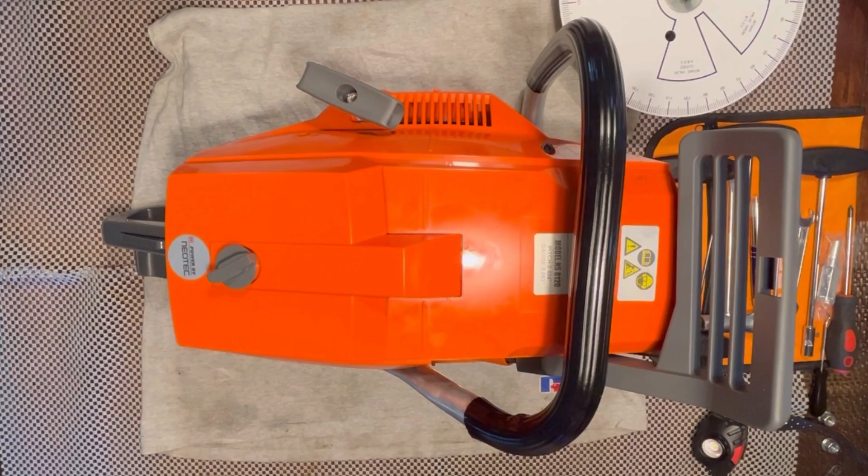Typically I tear saws down to repair them. But just a couple things I wanted to say before we get started on this, and I appreciate you listening to this part if you could.

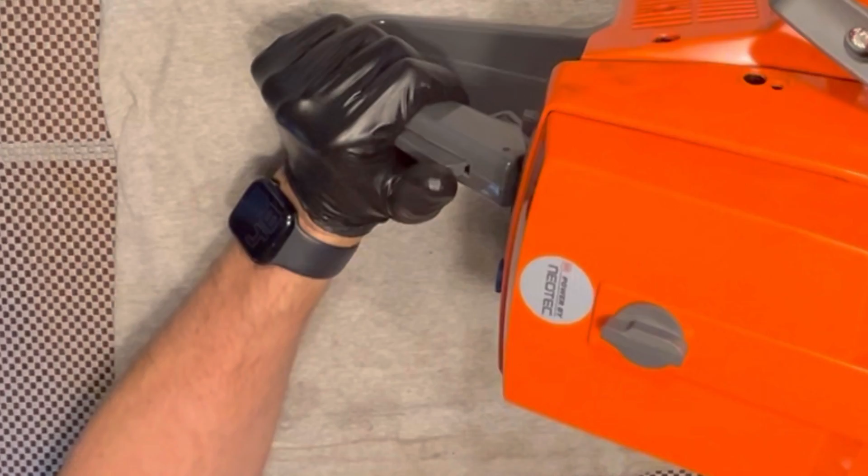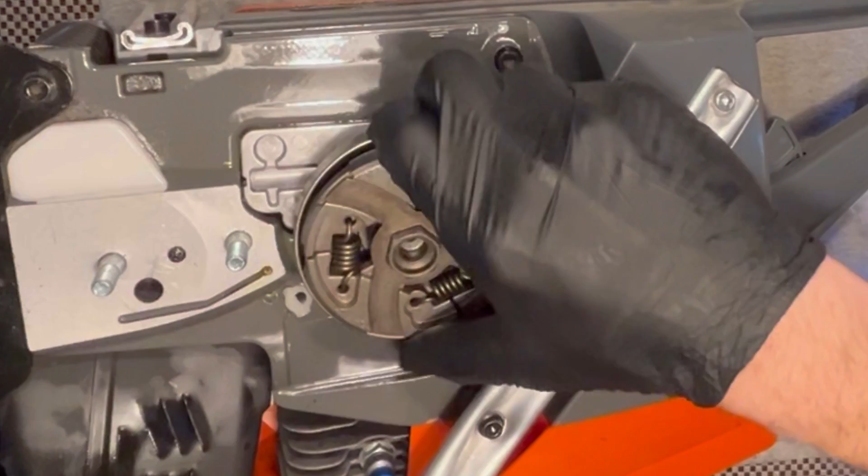Next is the oiler. Let's see if I can get this clutch off real quick here - righty loosey. Probably not. There it goes. Yeah, it says right on the clutch how to take it off and put it back on. You'll see it say 'off' right here, this way. Just in case you're new to saws, they're a lot like that for safety. So anyway, there's the clutch, take this off, and the bearing.

And the sprocket, which goes here. If you don't know, this comes with a 7-pin on it, and you have an 8-pin that's optional, because this saw definitely can pull that 8, no problem. But if you're going to be milling, I encourage you to leave the 7 on there. You can also put a 3/8 on there, whatever you want to do.

What I want to say real quick is this clutch housing fits inside this worm gear right here. The worm gear turns the oiler mechanism inside. So that's how that works, if you don't know. Most people watching this probably know that, sorry guys, but I gotta put it all out there.

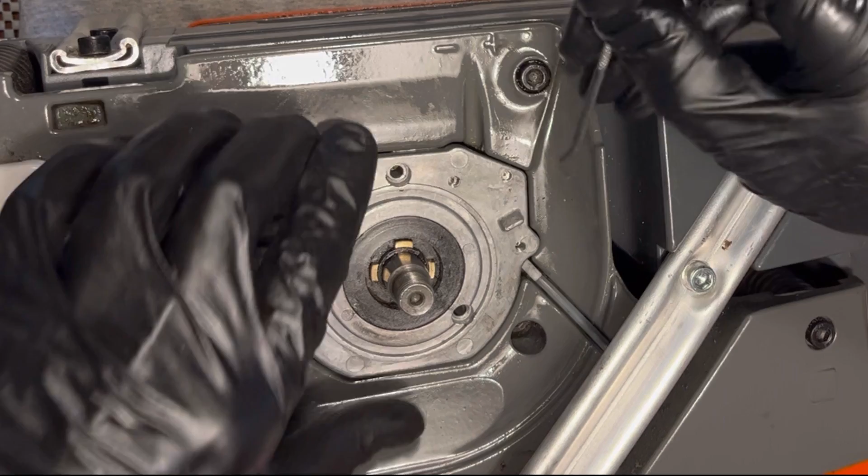And, well, you want to take this off first. Counterclockwise takes it off. Okay, that's your worm gear. Doesn't matter, you don't have to take it off first. And there should be a washer in here too.

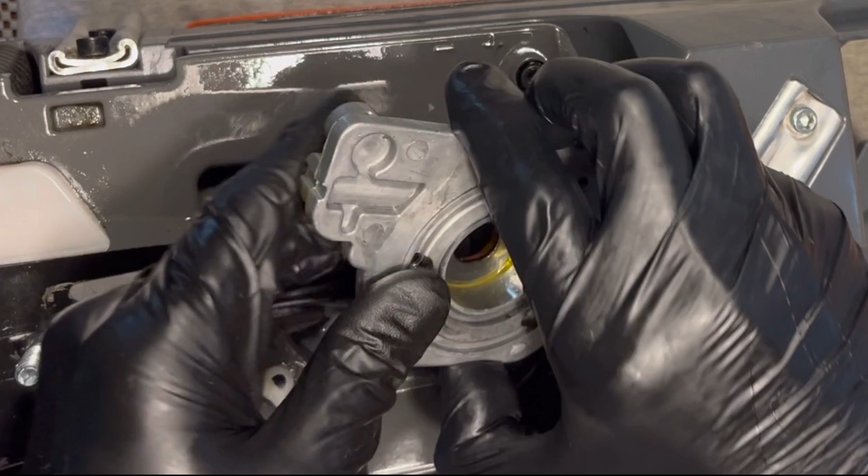Yeah, there's a little washer right here. And this right here is the seal to the PTO side, so be very careful with that. And this is what it looks like.

Man, a little spring starting to come off there too. You don't want that off.

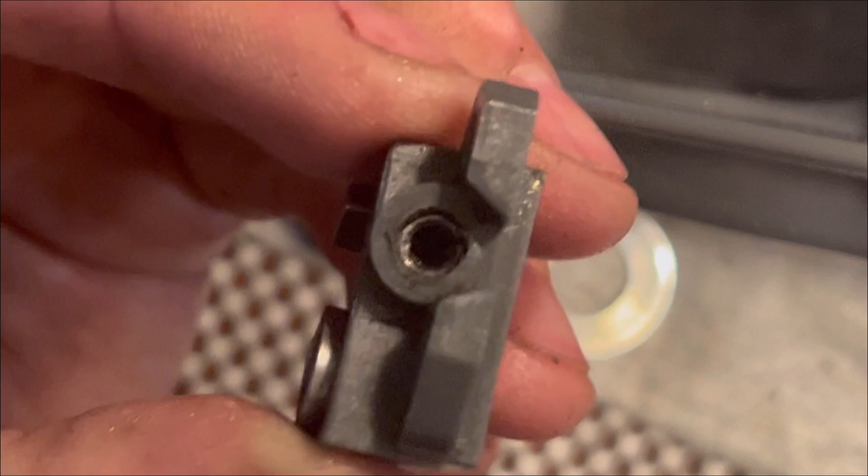As far as the oil adjustment goes, I think this was their attempt at it. There's typically a larger flathead screw here. And what they'd done was they just kind of capped it off with the small Allen.

So what you can do basically, and this works in conjunction with your manual oiler, it's almost like an idle screw. See how the screw, or the arm for the manual oiler, goes up and down. I think that's what they were trying to do there, which in theory I guess would work.

I don't like how loose that screw is. I also don't like the fact that you can turn it all the way out, because all the way out would be, oh, that's the other thing.

It's the opposite of what the OEM says. Well, it's the opposite of what the chainsaw here says as well. Plus is counterclockwise, and less oil is clockwise. It would be the opposite here, because clockwise pulls that arm up, which gives you more oil.

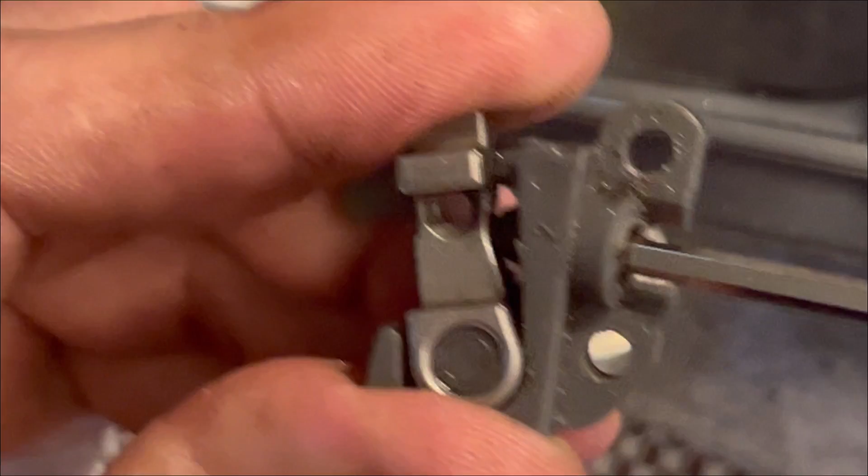So be aware of that if you get one of these. That's kind of what that looks like. And there is a little, I don't know what this is. I think it just protects this manual oiler mechanism from getting dust and debris in it. This little sponge thing right here.

But the problem you might come to see is your oil gets pulled from the bar oil reservoir from this port right here, and this is where your filter and everything is on the other side of this. It gets pulled up and then it comes right through here into here, and it continues to pull it through this port and then in through here.

I don't like this design at all, FYI, but whatever. And then it goes through there, then it goes inside the tank, then it loops around in a line, a little rubber line, and then it comes out right here to oil your bar.

One problem was I opened this, mine wasn't oiling. I opened this and there was a little tiny O-ring just kind of sitting, hanging out right down here. And I'm like, oh, that doesn't look right. I didn't know where it went because I've never opened one of these before.

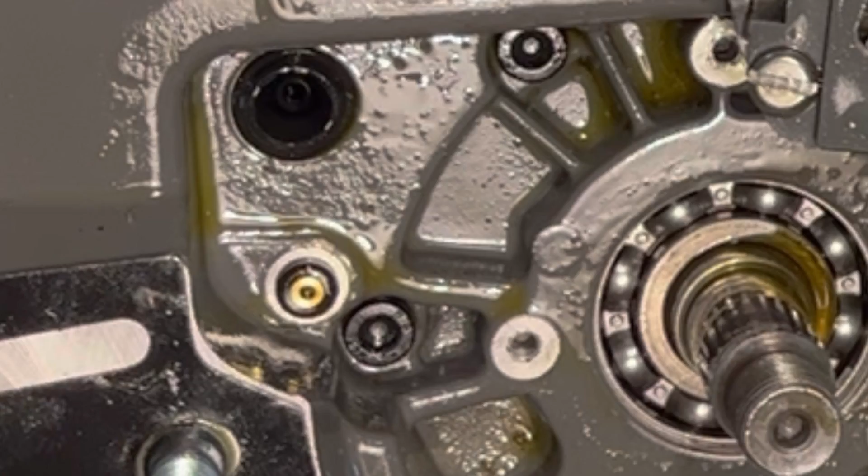And apparently it goes right here. There's two O-rings right here on this. Okay, I don't know why they did that. It probably isn't factory like that, but it might be. But there's two O-rings right here on mine. Okay, put it back on here.

It worked just fine. Now Killinger's, I don't know when he's going to put his videos out on this, but hopefully he's not going to beat me up for saying it. But on his, this whole mechanism right here, this screw was out and just laying down here, and so he had to feed this back through and tighten that screw down.

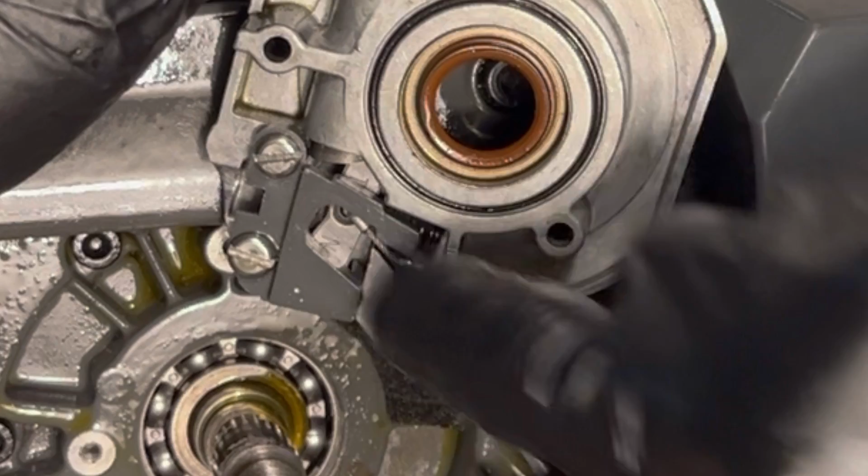And because the manual, this is a manual oiler, you know, it's up by the on-off switch. So when you pull it, it pumps more oil. It allows this to pump more oil is what it does.

Word to the wise, unless you have a lot of patience, don't ever take these two screws here off, because there's a spring right here that'll fly off, and if you don't lose it, you try to put that back in, it is a pain in the butt, man. Putting all this back on in that at the same time.

So another thing I want to tell you about really quick that I know about is I was looking everywhere for the vent for the bar oil, because there's a vent in almost every chainsaw, right?

Here's another design - the vent I found. I'm not sure if this is OEM, but I'd be surprised if it was like this from the factory. You can see right here, this is broken off, it's a chain guide. There's one on the bottom, and a big one that sits right here on top. I was prying at it because most of them just pop off, so you can replace them when they wear out. This one didn't pop off, it broke off. But behind this, right here, sits the vent.

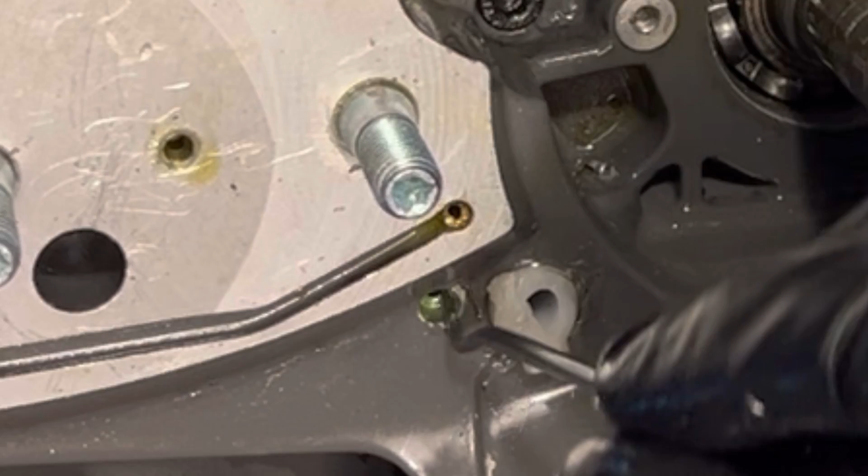It's a little duckbill vent. I'll take this off and show you. But you can't take this off unless this chain guide is off. Hence the reason I was looking for that vent, and it broke. Anyway, right down here is a little duckbill. Let me get it for you, if I can. Yeah, I think it's coming. Well, daggone it. There it goes, there it is right there. Hoping that shows up on camera.

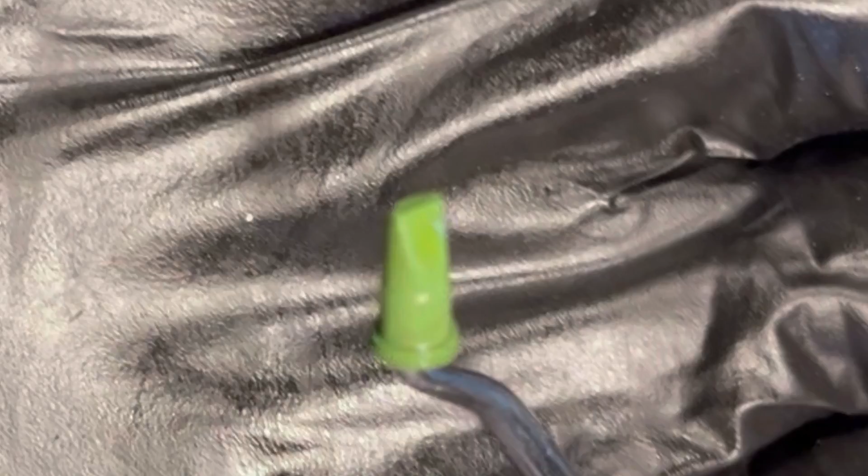It's a little duckbill, basically a one-way valve that works off pressure. It'll pull air in, but it won't let it out. But that's your vent, located right there. What a horrible place to put that, huh? Another thing real quick, this screw hole goes all the way into the oil reservoir. So if you have this off and you tilt your saw the other way, oil will pour out of that hole.

This mount is a D009 large Husky mount when you go to get a bar. So yeah, this muffler, real quick, let's talk about it. There's like 7 shark fins inside this muffler, and that's it. So if you plan on milling or using one of these saws extensively, I don't recommend that. You can get a plate or something, but it's going to burn this flag eventually if you run it over time. You can see where it sits down on the flag, see there?

And the back side of this is plastic. My buddy Tanton pointed that out to me, and I'm glad he did. That is not right - the OEM design has a deflector that comes out like this. So what I'm probably gonna do is just punch all this down and make something here, because I plan on milling with this and stuff, but I don't like that, not a good design.

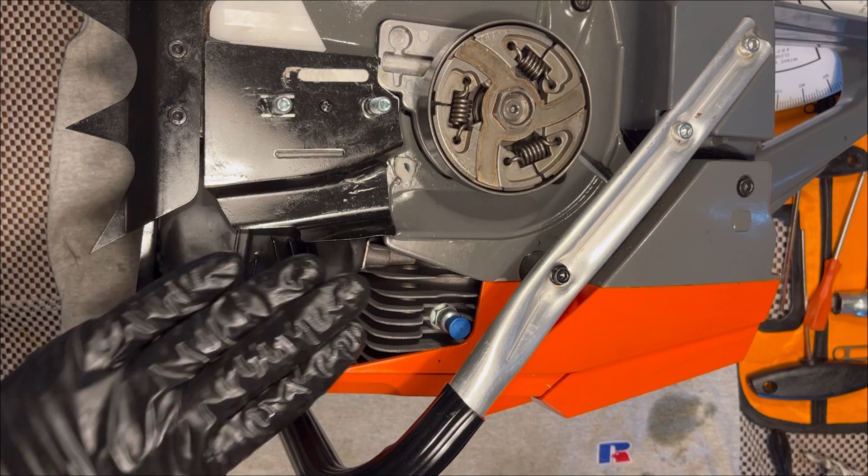Okay, so there's little protector pads here, I don't know what those are called. And there's 2 Allens right here, and then these 2 Allens here. And when you take this out, I wonder if I remove these screws, if it'll help. I hate to do that, but I'm going to.

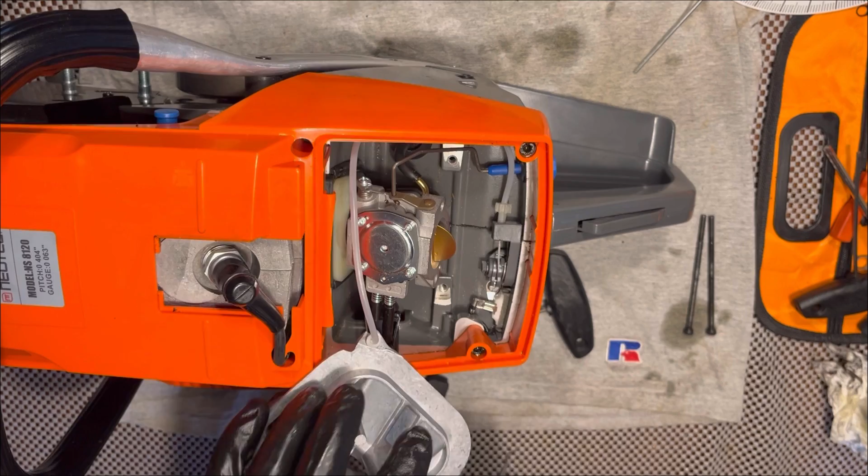Not really. You can see this sucker is in there now. Gee whiz, I'm gonna try to pull that to the side. That's the throttle? Sure is, jeez. Yeah, that's like really in there. Just a tiny little slit right there. Can I pull this? Oh yeah, so you get this rubber stuff.

Here we go, okay, now I'm gonna take this off. And oh, this intake just, wow, just kind of, yeah. There's the intake. Wow, yeah, it kind of just sits in there. So that's interesting.

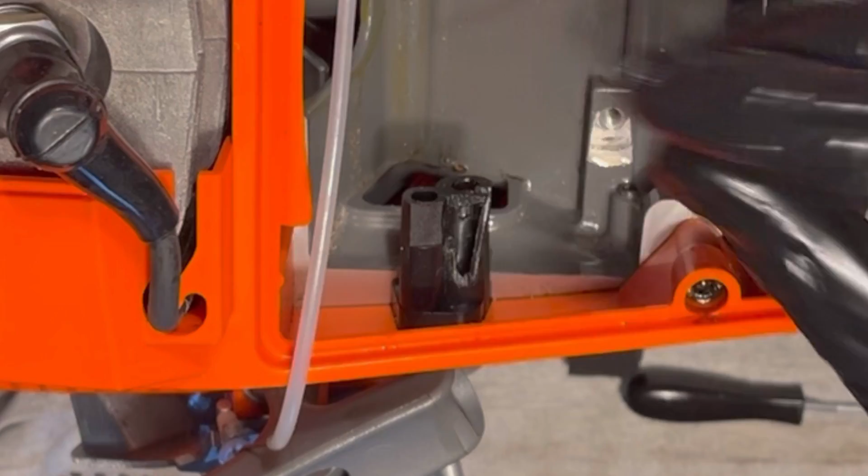So we'll kind of put that to the side. Here's one thing I do not like, is this deal right here. Is it molded in there? This little housing for the jet screws, I do not like that. It looked like it's kind of cut or something. I don't understand that - it's probably cut so you can get to the other screw, but let's look at this carburetor.

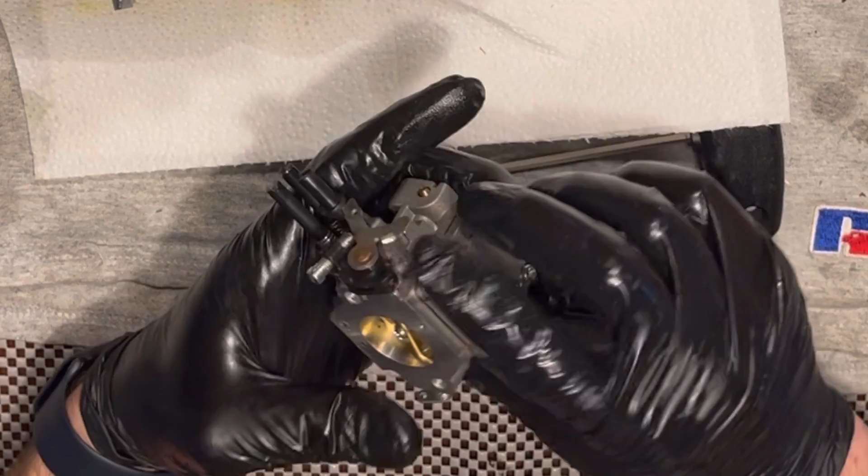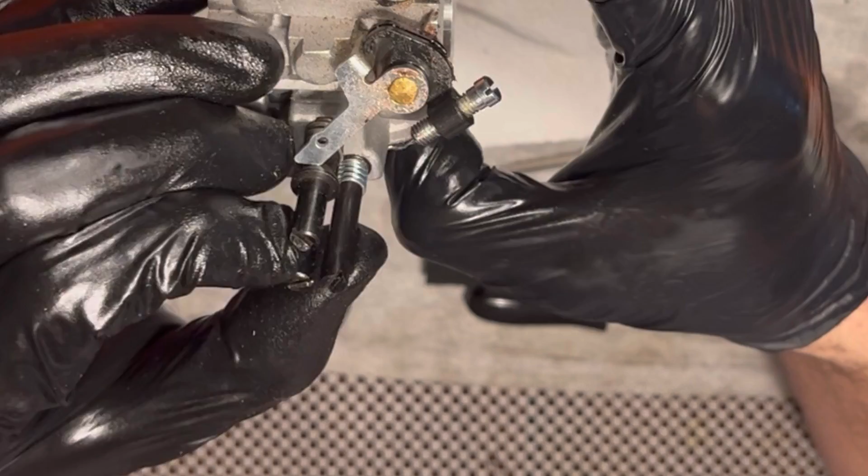Again, you guys are looking at this at the same time I am - that's the first time I've ever even had one in my hand. So I'm looking at this here, so this is what it looks like. And so when you go to tune it - that makes no sense. Hold on. Oh, wow, okay.

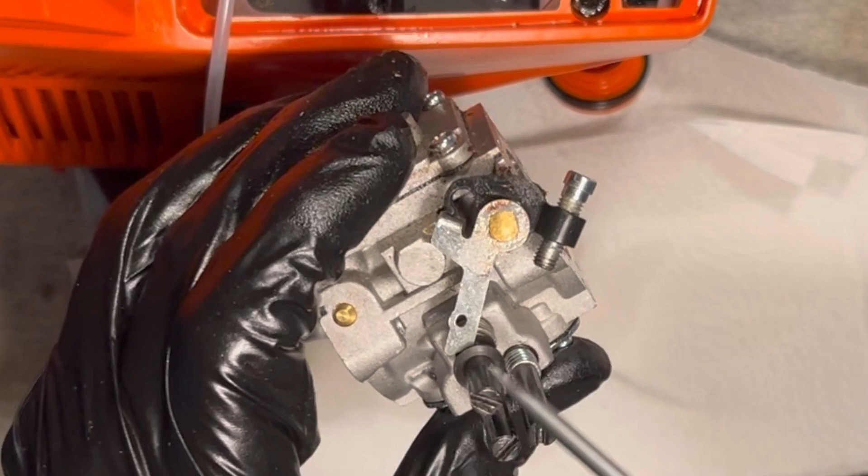This is the idle screw. These two right here are what you see through the big hole on the side. It says T, and this is the one that you see where it says L.

I thought this was the idle screw because I saw these two together. Okay, I'm wrong, so oh man, this just gets deeper and deeper. So obviously this is your idle screw right here. So when I said this was three turns out from the factory, it was actually the idle screw and the high jet screw. I'm assuming, yeah, it says H on it.

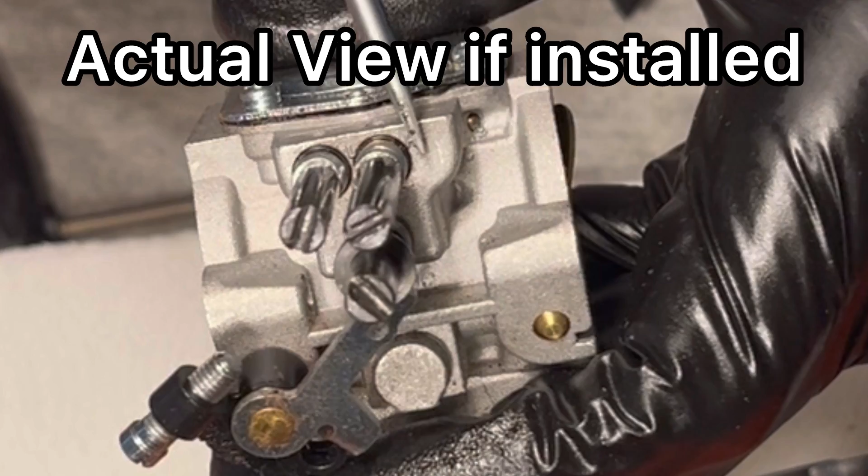Yeah, this actually says H and L right there. So it says L here and H over here. Man, I hope you guys can see that. There's a little H right here for high jet and an L. I wonder if this is a WJ3 or something.

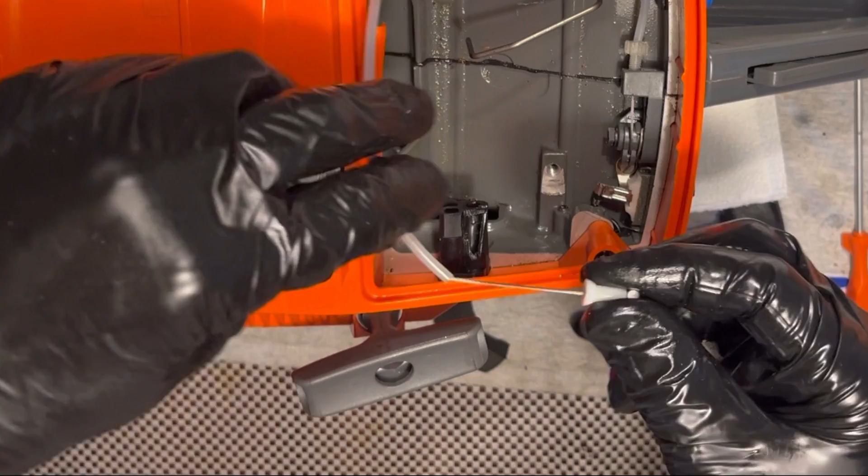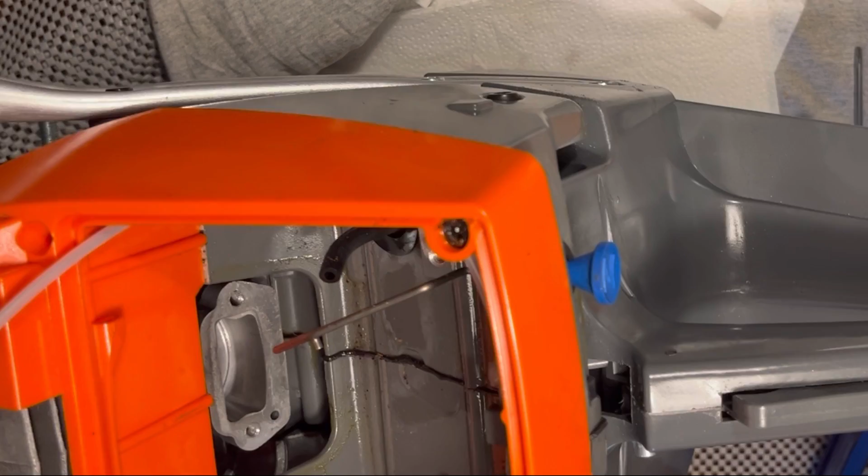Okay, so this just comes out, you just got to pull this down and it comes out. And that's the throttle cable. Here's your choke. This is the manual oiler right here, and the on-off switch, ground. And then we took the intake boot out, and there's the intake, as you can see.

Let's take some more of this apart. Okay, so here's the top cover. There's four screws, one here, here, here, and here.

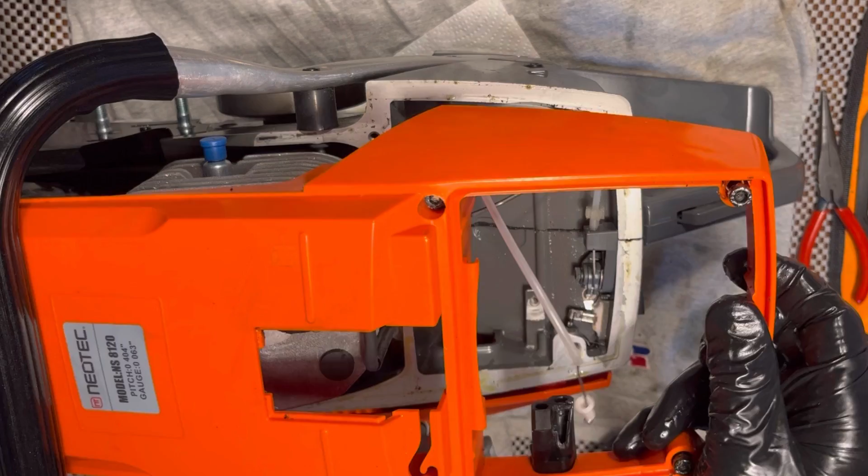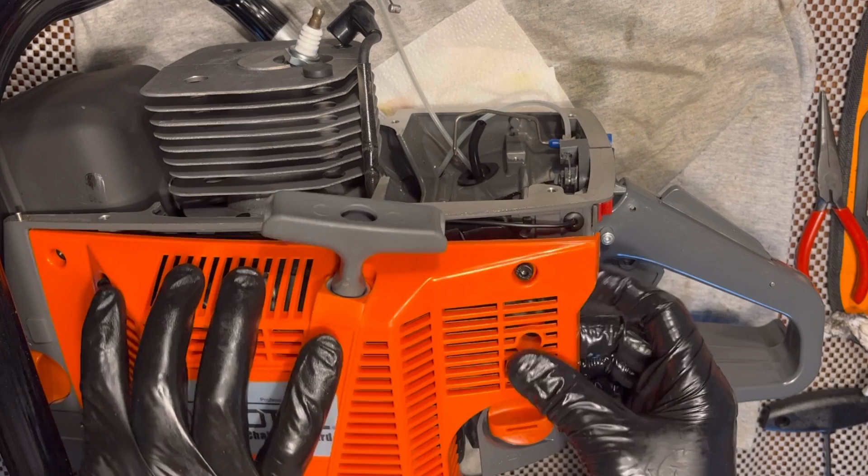There's the plastics, looks fine. Here's the cover, I went ahead and unloosened it. Four screws on that, here, here, here, and here.

Very beefy. Killinger said he had some issues with his. Something about these, I forget what they're called, tangs or something. I don't know, but he said they weren't catching this very good. So be mindful of that if you get yours, which I always am with these Chinese ones, because I don't think there's a rope I haven't broken on them. Good idea to just change those ropes out, man, they're not very good.

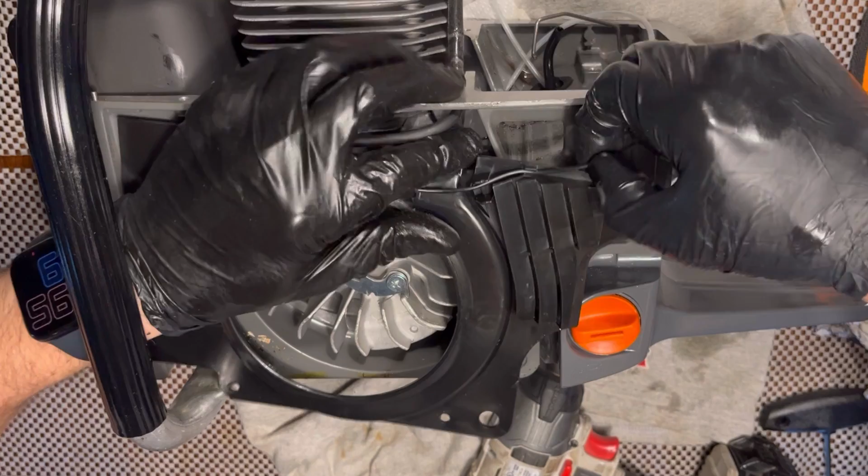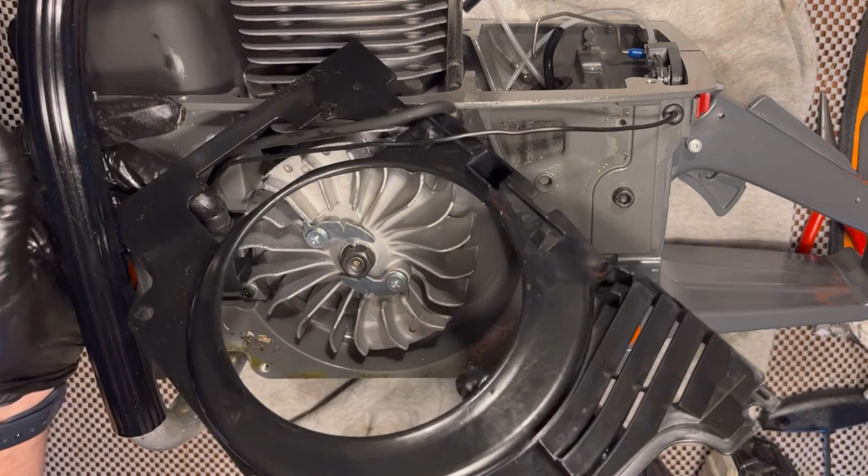But let's take this all out of here. Now if I can get that out of the way just enough so you can see the coil. Yeah, looks like it, so there's the coil, a little small thing.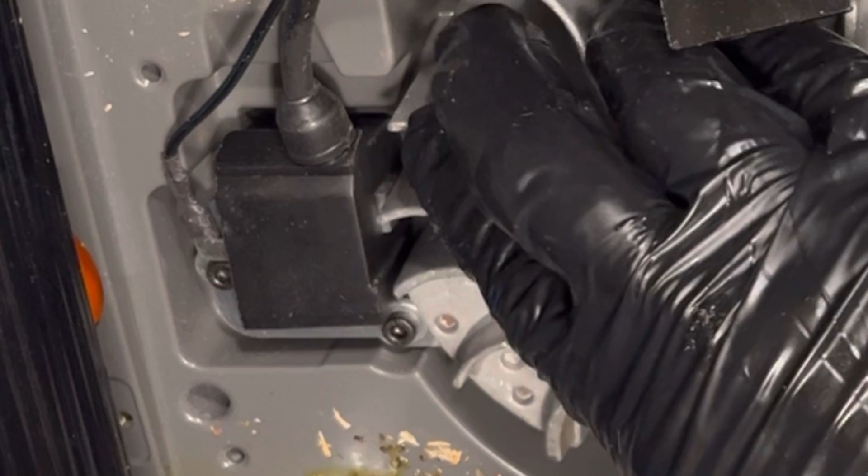Let's see what my gap looks like. Yeah, it's not bad, about the size of a business card. So there's the flywheel, hopefully that's on there tight.

I'm gonna go back and tighten everything up. That's usually what I do when I get these, I'll blue Loctite everything as much as I can. So it's just a good idea if you get one to do that.

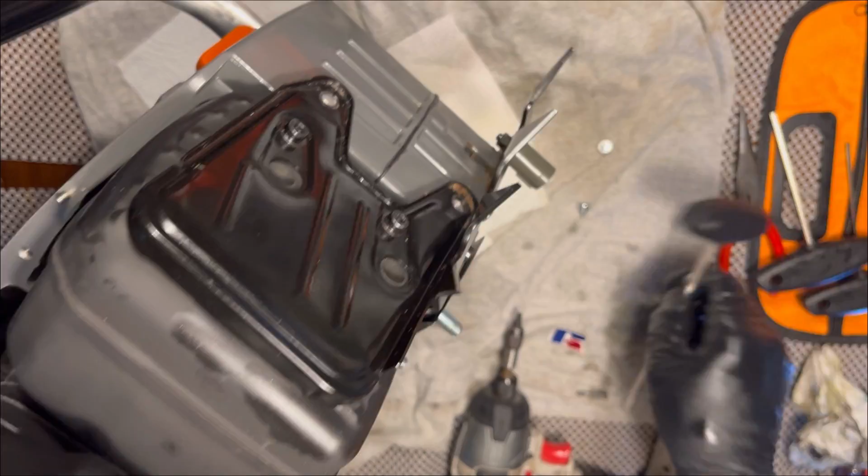So you have a couple T25s here, Torx, small guys. These aren't here. And then the largest Allen takes these two down in the muffler. And they weren't real tight, so I said I think this muffler will come off now, yeah.

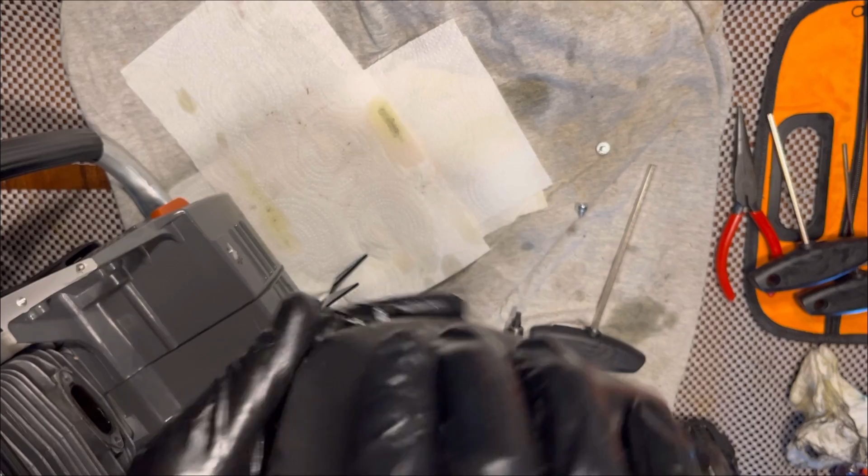So there's the muffler, real light, hollow can looks like. Yeah, so your largest Allen. It's always the one that doesn't want to come out, you know. There we go.

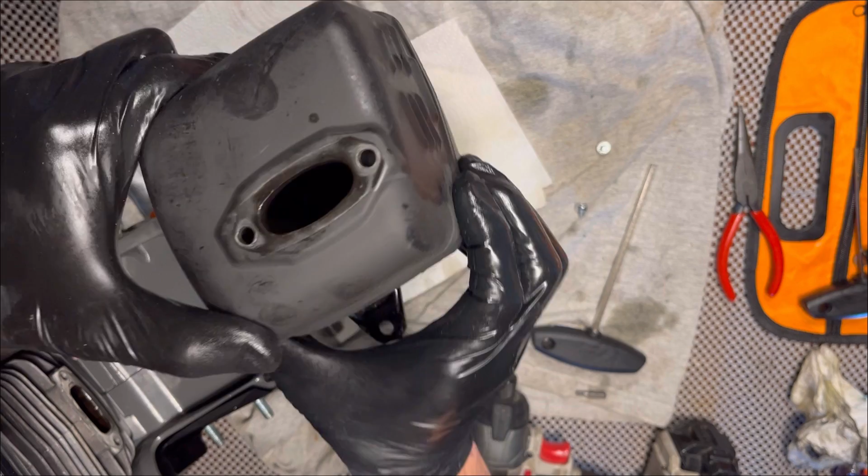Is it completely hollow? Yep, completely hollow can, so that's cool. You know, I was going to tear this down anyway. This is a one-piece, I mean it's a two-piece, but they've welded it or seamed it together somehow. That's a big can in it. Dang. Yeah, I'm closing these and putting something up here or something because I don't like that design. But anyway, that's all you got to do to take that off.

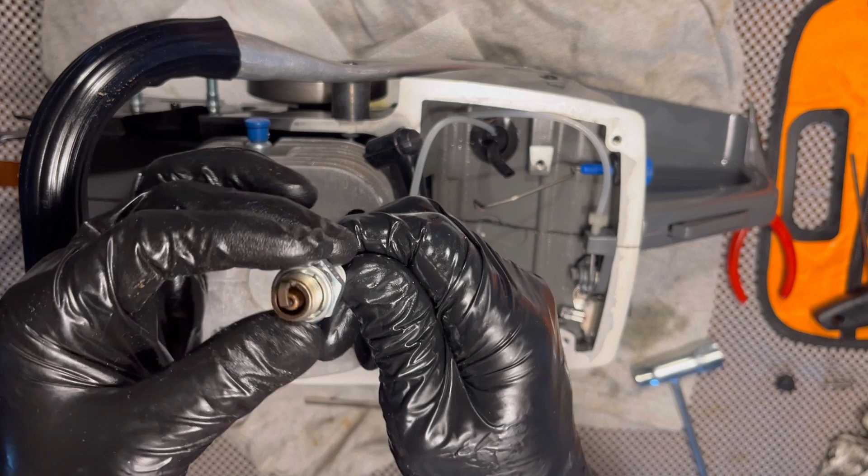Okay, it says NGKR plug. This was ran before I got it, I don't know how long or anything like that. They tested it to see if it would run possibly. But I run 40-to-1 red armor in all my stuff

with non-ethanol 90 octane rec fuel. So it usually doesn't look quite like that, so I had a feeling they ran that with some junk. But I mean, that doesn't look that bad, I'm just saying it's like a light brown, but I don't think it'd look that bad from the one tank I put through it, you know.

So let me get this top end off, let's take a look at it. Oh yeah, they got these in there good. Damn, so that's one good thing. Gee whiz, I went and Loctited that or something.

All right, the moment of truth here. Anybody want to place their bets on how bad this is going to look? I don't know, we'll see.

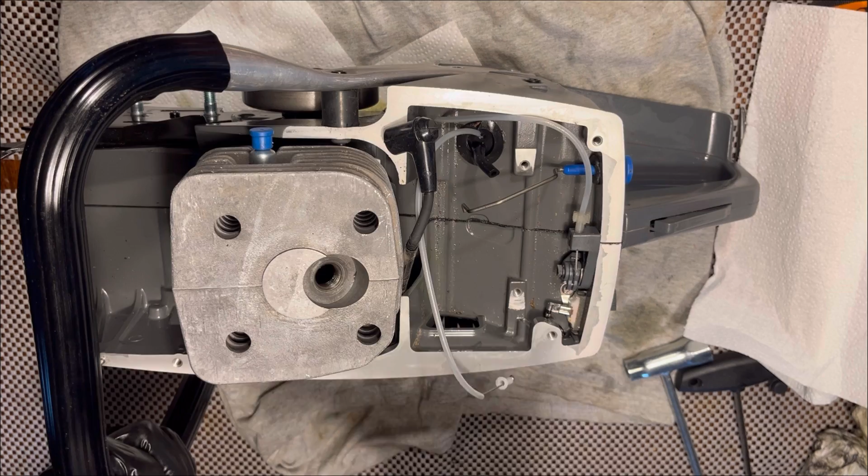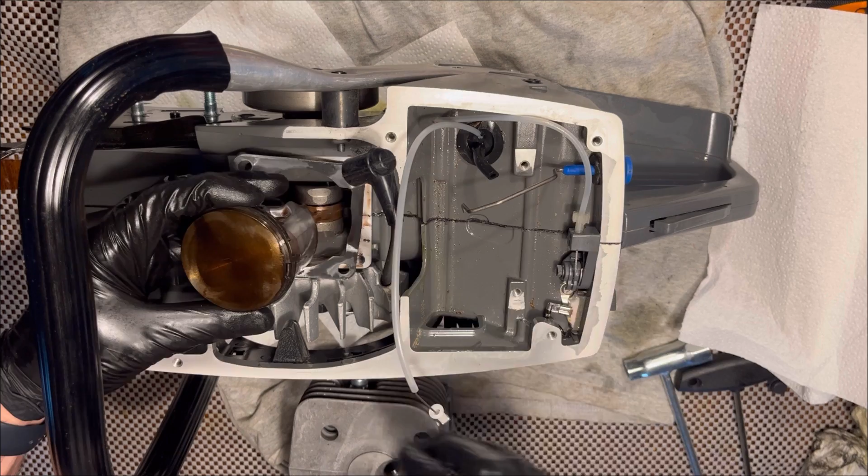Yeah, my red armor is just barely coming through on this stuff. I don't know what they ran through here before, but it wasn't anything good. You can see it's not red, it's like a brown from whatever they ran, but you can also see that the red armor is doing its job. It's all over this piston. Look at that, everywhere.

So, I mean, everywhere in the crank. Oh, that was one thing. I was really surprised that this saw has hardly any vibration. I was super surprised at that.

Anyway, there's the wash pattern. Let me get that kind of, there's the wash pattern there. So, just to let you see, kind of a strong one over here, it looks like. Could be worse, could be better, could be worse. Let me just wipe it out real quick so you can see what's going on at least.

Yeah, man, I don't know what they ran through here. It looks like crap though. I'm just kind of cleaning it out so we can see what's going on. I wonder if I should clean it out with brake cleaner or something so you guys can see better. I don't like that. I don't know what that is.

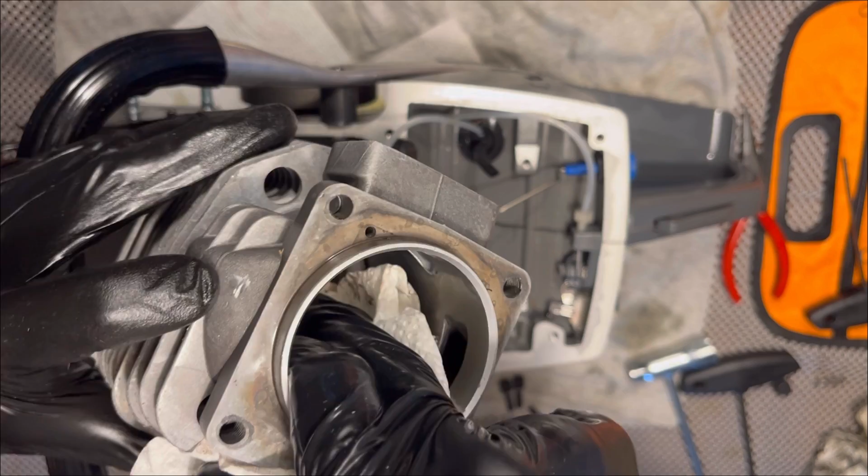Yeah, that's on the flywheel side. I don't like that at all. Looks like it's something scuffing it, like the edge of the flywheel.

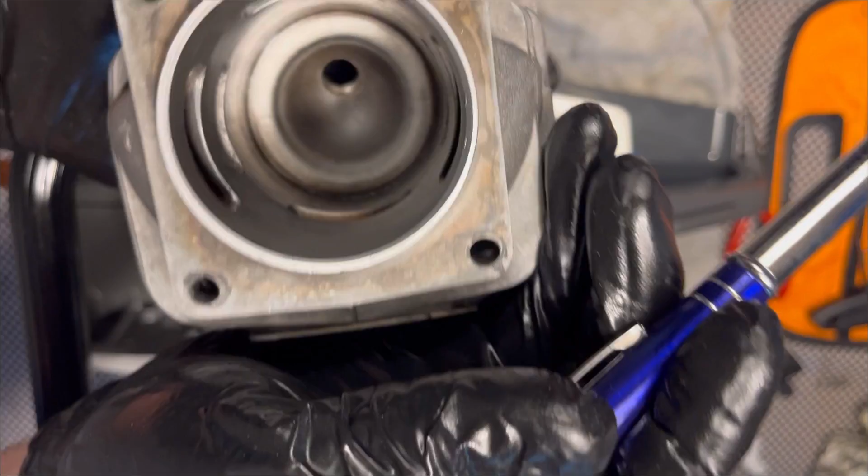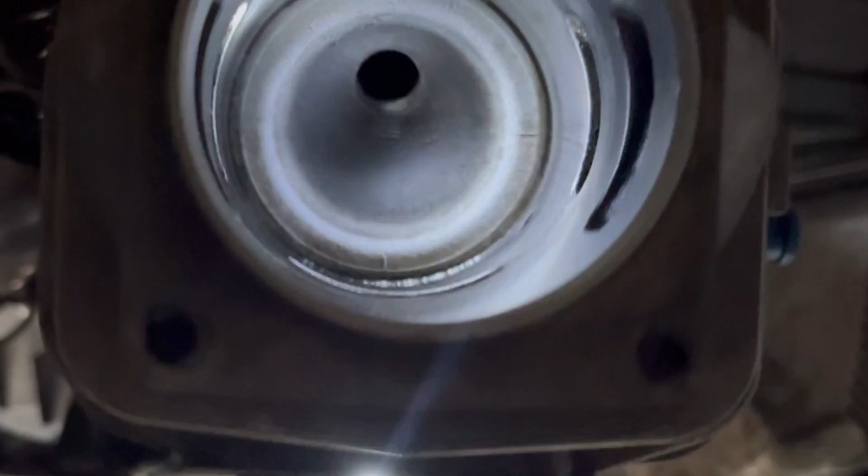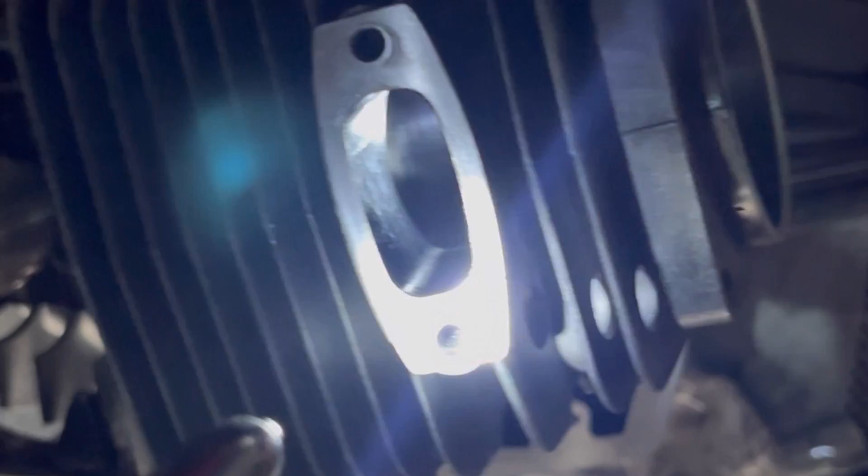I have to do that in real time because people cry if I don't. So, there we have it. So here's, is it the muffler? Let's start with the intake. So, there's the intake. Here's the exhaust. Smaller than I expected. That doesn't look too bad at all there. Neither one.

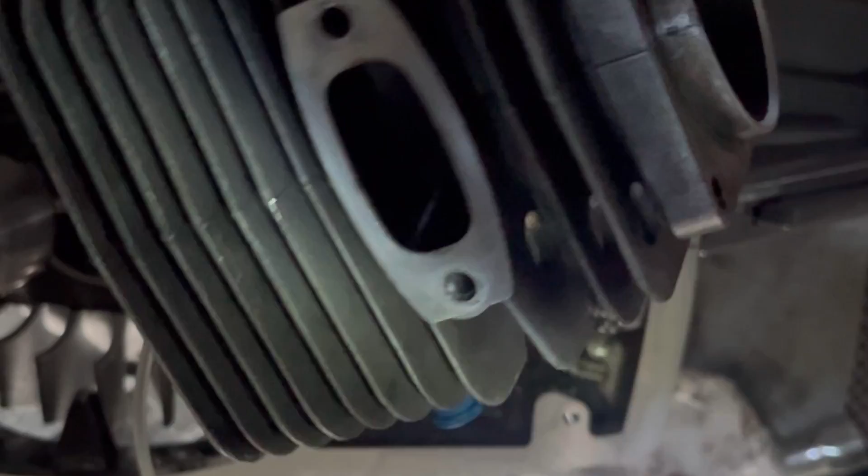Huh, so intake's on this side. So just to give you a shot, maybe that chamber down there. Can you see that okay? Not bad, dang. And then it transfers.

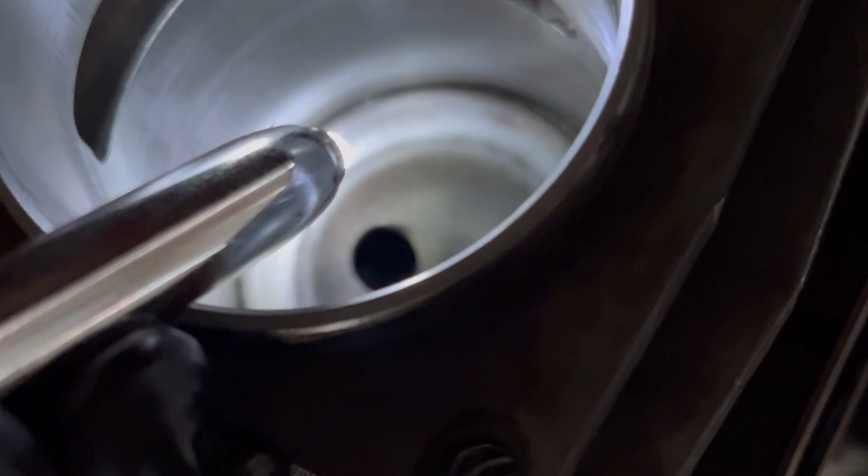A couple little boogers over here, looks like. If you can see those, yeah, that looks like crap. I don't know what happened there. But everything else looks decent. If you can see those upper transfers, they're flawless, really. If you can see them, not too bad.

There's the inside of the exhaust. Not really too terribly bad. And yeah, this side looks a little bit better. Lower transfer, and then the upper transfer, I don't know what that mark is down there. It's weird, it's all the way around. Anyway, that other upper doesn't look too terribly bad either. And then the intake, intake looks pretty good.

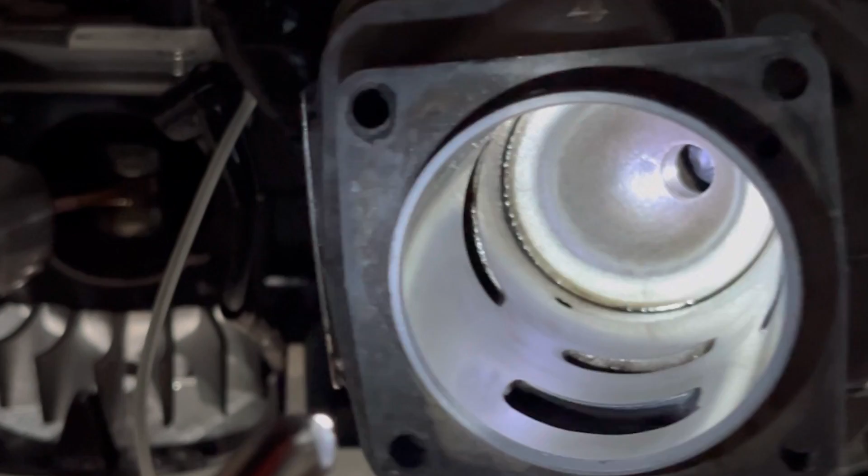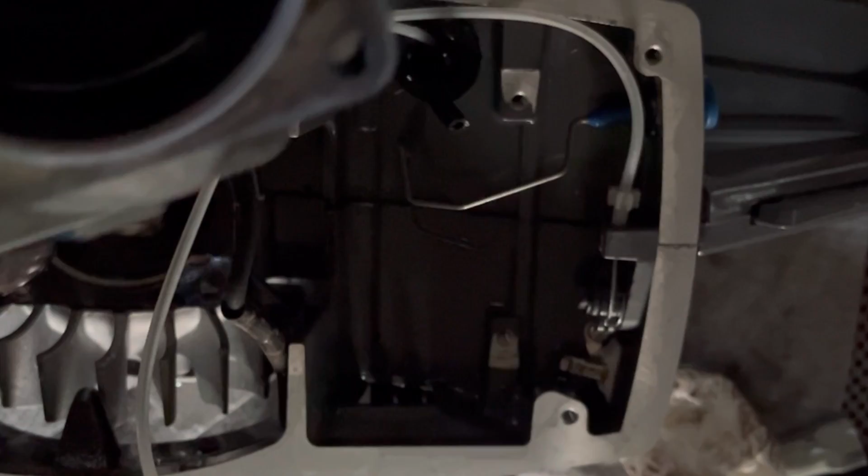So overall, that's not that bad for China. I mean, you guys have seen a lot worse, I'm sure. I know I have. But this thing, I'll work it a little bit and etch it out a little bit, maybe, and probably get a little bit of a performance boost. Again, I'm just using this for milling. I don't know, I was honestly expecting a lot worse.

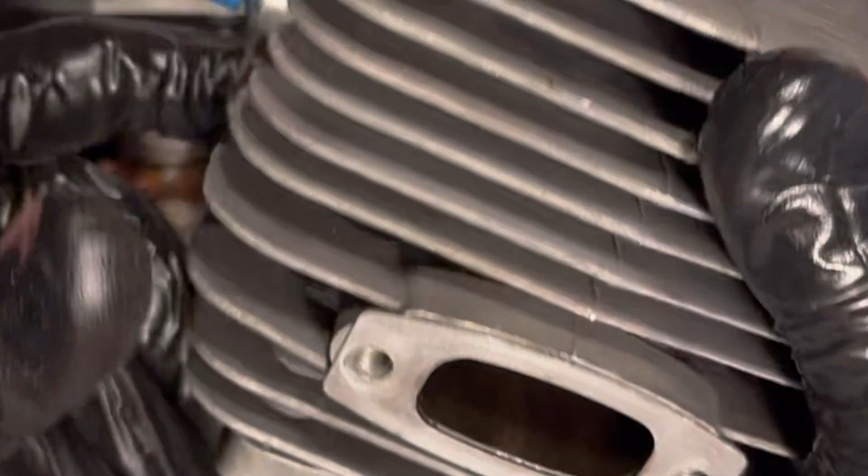You know, I really was. I was expecting a lot worse than that. So, pleasantly surprised. I don't know if you guys can pick that up there either, but yeah, I was surprised. I don't see any markings on it, in case you were wondering. No markings on anything, nowhere, no markings on this one. So, but that's pretty typical for these prototypes, clones and stuff.

So anyway, yeah, really wide, narrow exhaust. I thought that would be a lot bigger, like you know, like a Stihl. Those older Stihls, they had a big exhaust. Intake's not too terribly huge either. A lot of room to do some stuff with these. I can see why people turn these into racers, you know. And oh, looks like my glove broke.

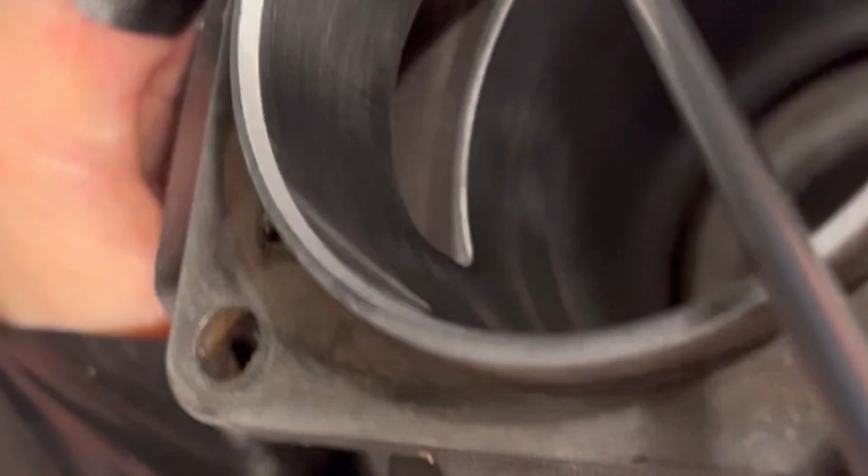But the only real bad part I see is right here on that lower. I don't know if you guys can catch that or not. Right here's a couple little marks. Easy to fix that there, just get a little diamond burr and hopefully it don't chip after I do it. But yeah, not bad, man. I am serious, that is not bad. Way better than I expected.

I don't know, leave down in the comments what you thought about all this. That's pretty surprising. So, yeah, double ring piston. They're thick pistons, thick piston rings. I don't know if you can get any of that crank or not.

There's some residue down in there. That red armor's probably cleaning it all out, whatever it is. I'll clean all this up real good before I put it back together and do my mods.

I'll probably just check the timing here next on it, and probably call it a vid, because I think that gives you guys a pretty good in-depth indication of what you got going on here. So let me get some timing numbers, and I don't have to do that on camera. I can just do the timing and then kind of talk about them.

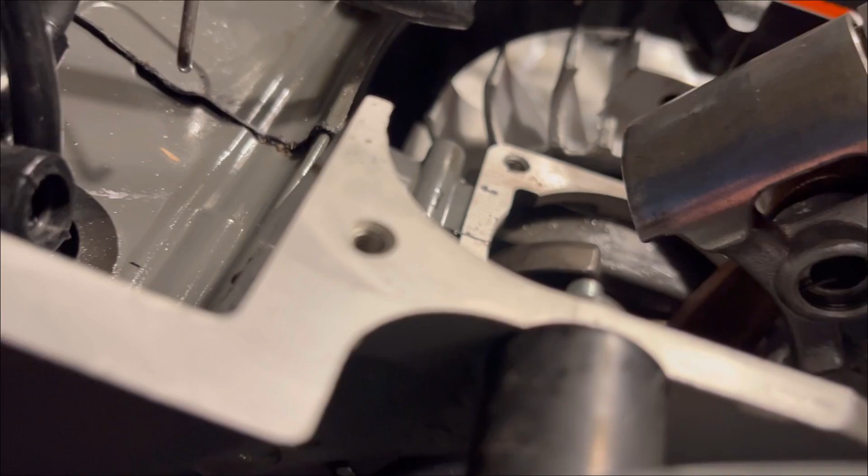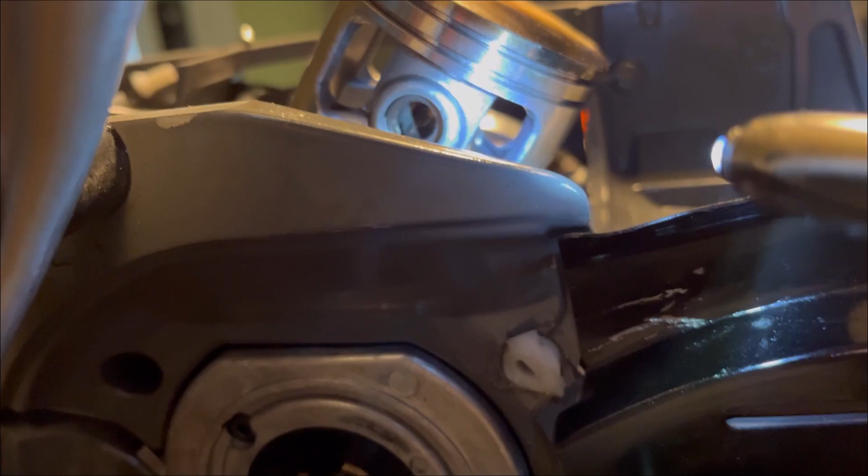I forgot to show you guys this piston. Before I start timing it, let's look at that. Grab this little light, maybe you can see better. Not too terribly bad either. I mean, it's not that bad. I'm really surprised.

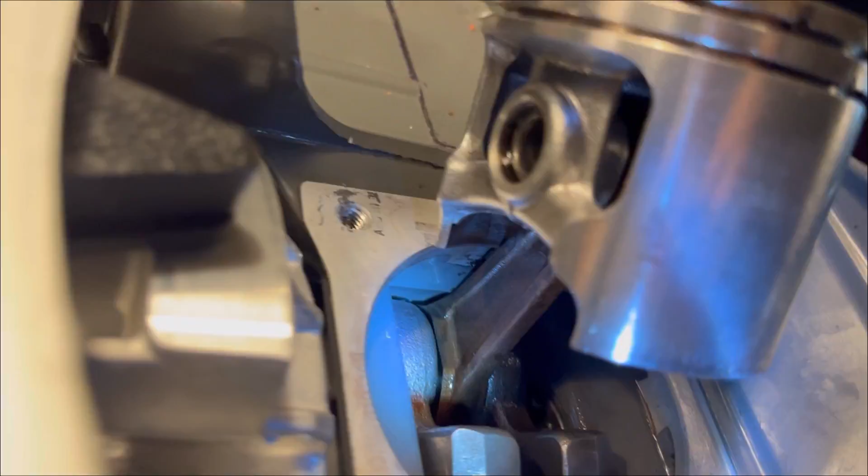There's the intake side. Let's look at the other side here. Not too terribly bad. And again, down the crank there, if you want to see a little bit of that. Again, a lot better than I expected on this thing. They're stepping their game up, that's for sure. I'll clean all this up later, but just thought I'd show you the piston real quick. I'm gonna go time this. I'll be right back.

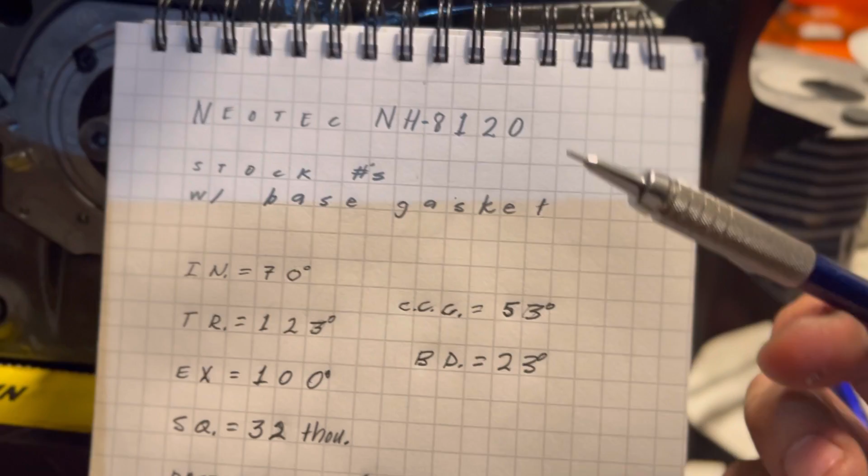Okay, just finished up here timing this 3120 clone, and this is what we got, and my thoughts. So this is stock numbers with base gasket on.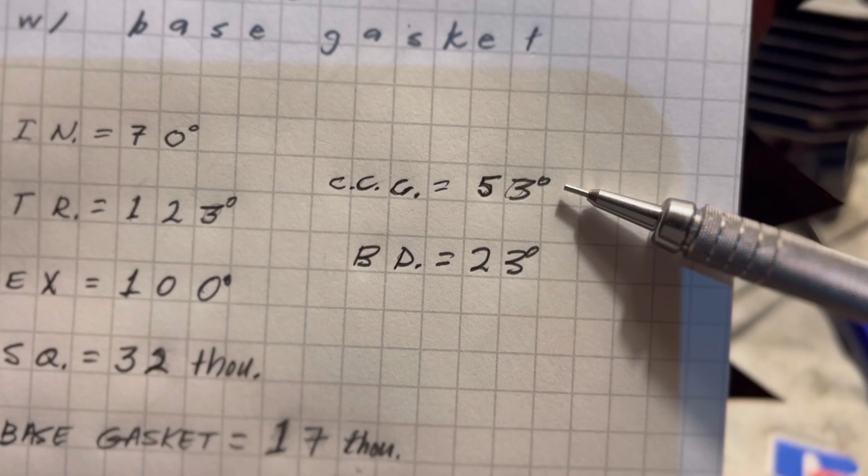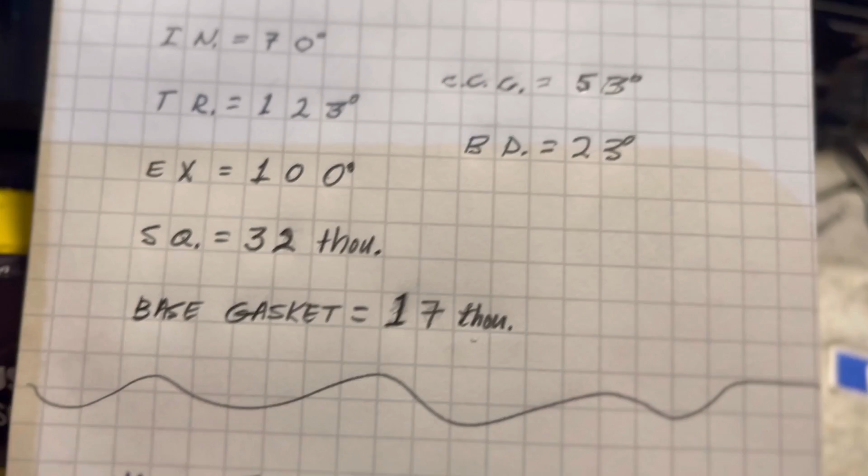Intake is 70, transfers 123, exhaust 100, squish 32 thousandths, and the base gasket is 17 thousandths. Crankcase compression 53 degrees, and blow down 23 degrees. I think I got that right. Someone will surely tell me out there if I'm wrong. But anyway, I have some thoughts on this.

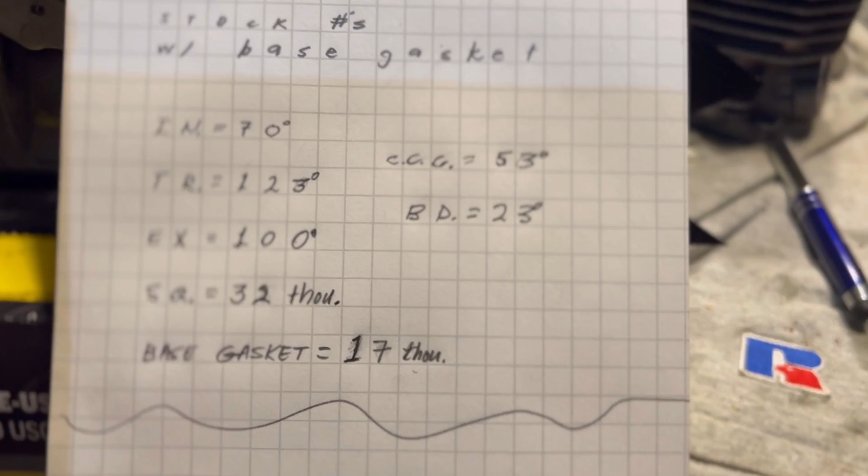Those seem real close to stock numbers on the cylinder, the timing numbers. So I had an assumption on that too, but I think I'm wrong. So scratch this part here with the numbers. I'll do that right now, because those are close to stock numbers.

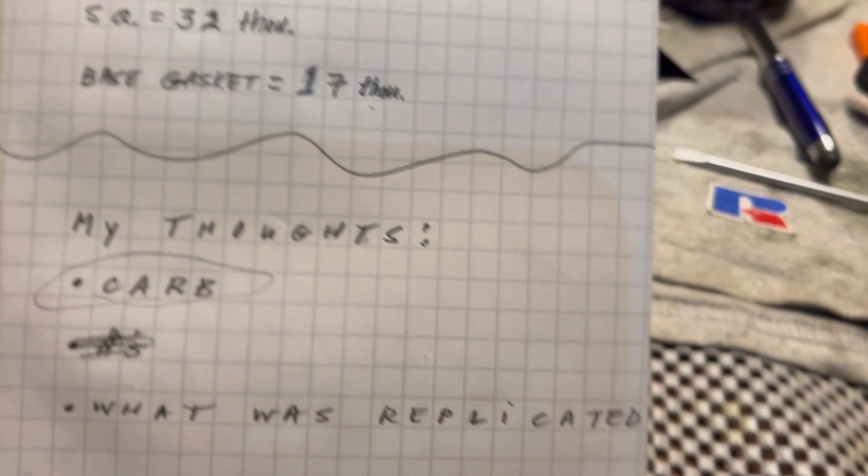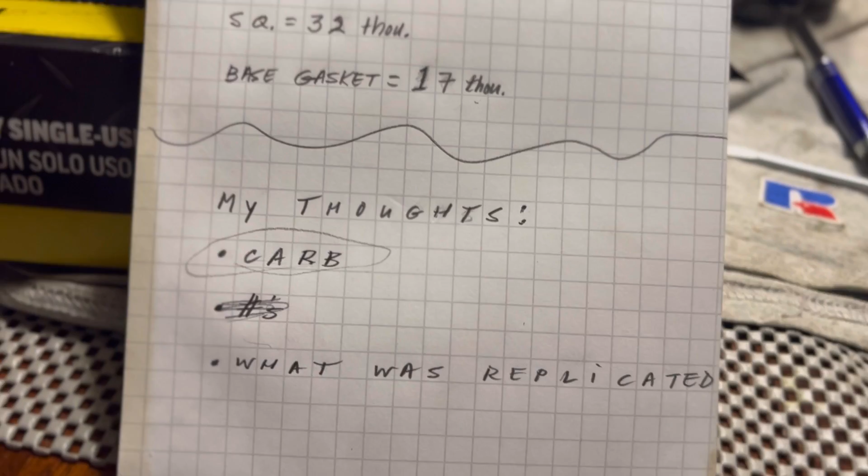But the carb, what was replicated, I believe, because you kind of got to call me out, I guess. I've never done it, but some of these companies, they need a product to replicate, so someone will send them a saw, or go over there and give them a saw, or whatever they want to clone, so they can make molds and castings and whatever. And you gotta call me out and go do that or whatever. I'm not going to ever do anything like that, but some people are willing to.

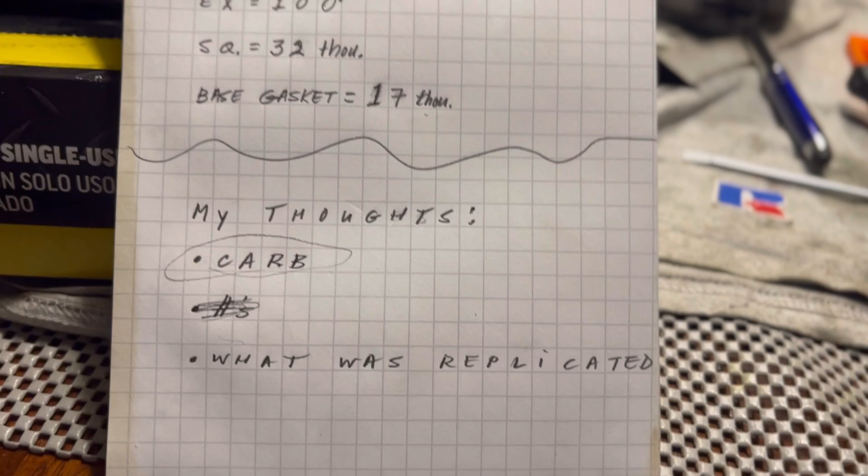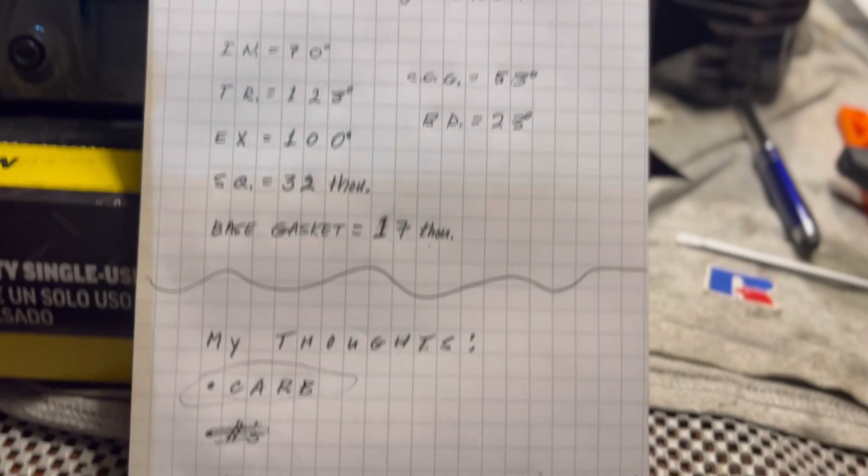That's on them, I don't know. But someone did on this 3120, I believe. And I know they did, because that's how it happens. I know for a fact that's how it happens. That's how they get all these saws. But I think someone has modified the original saw that they replicated this with, and I think that's how they got the carb like that.

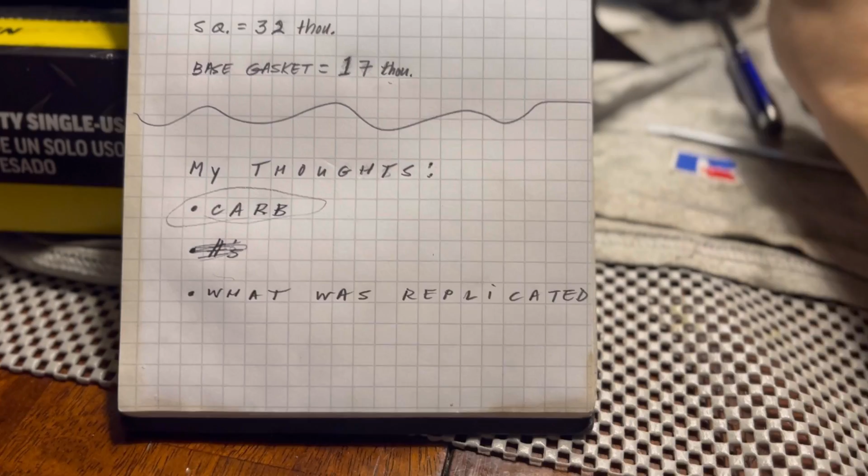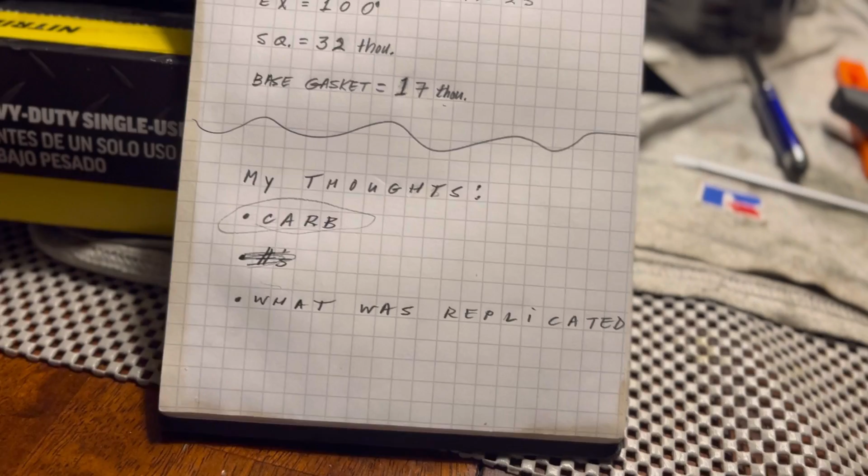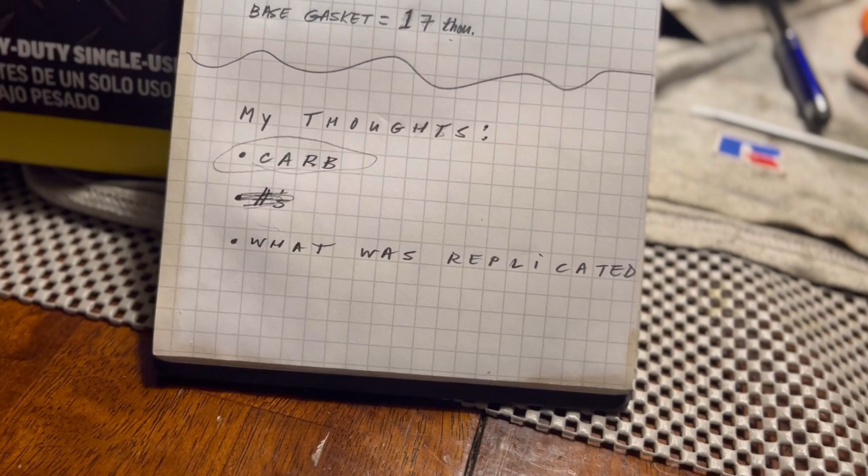And I had the assumption on the cylinder, but those are so close to stock numbers, I don't think that's correct. I think they had modified that carb and brought that saw over there, or sent that saw over there, and that's what got replicated. Because why would these Chinese manufacturers give a crap about that saw having anything but the stock carburetor? They don't care. I mean, they would sell the same units, I guarantee it. They don't care about that stuff. I mean, I wouldn't care. I would still buy the saw if it had the clone of the stock carb.

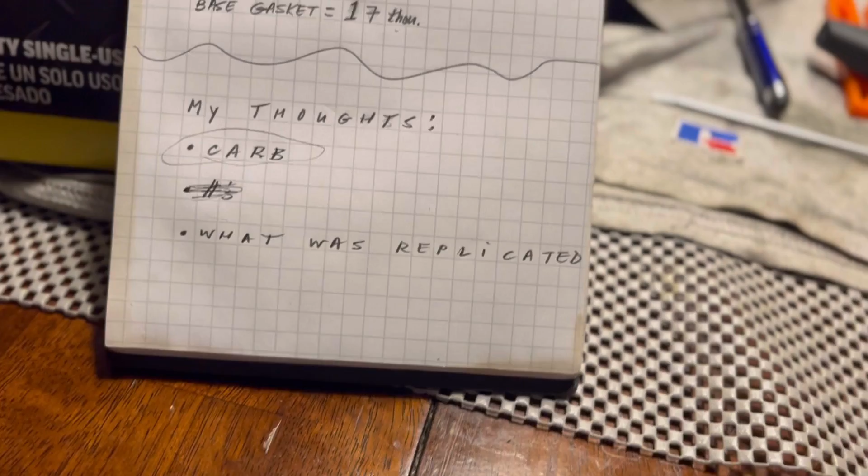But this one has two jets, and I find that very interesting that that's what they did. I could be completely out of place here, completely wrong, but that's what I think happened. I've seen some things kind of like that before. So anyway, you never know. Maybe not, maybe I'm getting old and believe in conspiracy theories. I don't know, but that's my thoughts on the matter.